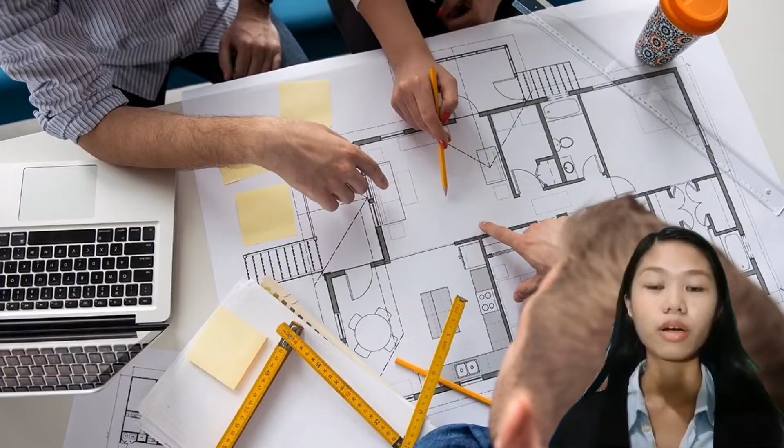The primary project players for this type of project are as follows: architects and design professionals, who create the overall aesthetic and functional appearance of structures. Landscape architects, who are responsible for the construction site and surrounding environment. The engineers, who are the primary designers for larger civil and industrial projects.

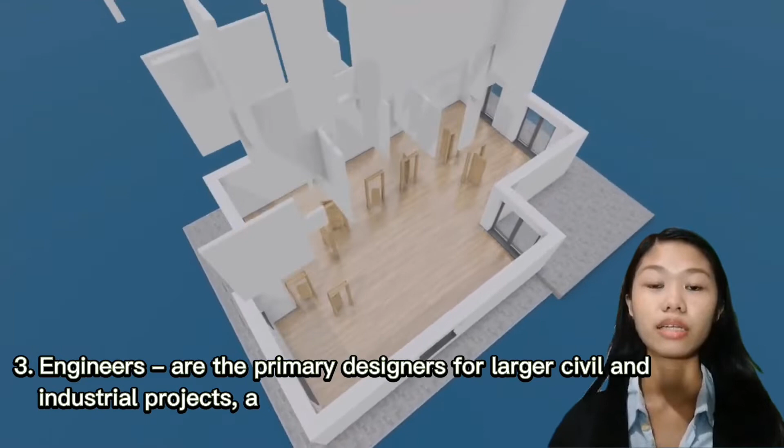Here are numerous engineering specialties available, such as structural engineers, for structural systems that support a building. Mechanical engineers, to plan and design a building's heating, cooling, ventilation, plumbing, and fire suppression systems. We also have electrical engineers, to plan and calculate electrical loads, circuits, lights, motors, transformers, and telecommunications. Civil engineers, who are responsible for the design of highways, bridges, tunnels, dams, site drainage, parking lots, runways, and water and sewage systems.

We also have construction professionals, who are responsible for all aspects of construction work. They interpret design specifications and generate cost estimations and time schedules.

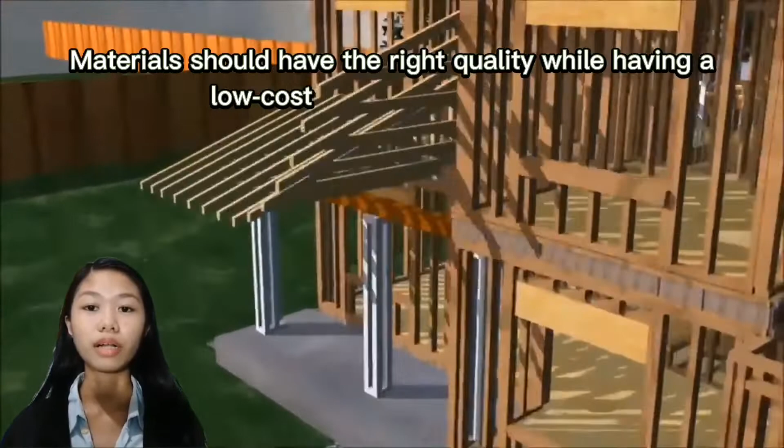The second subtopic is all about materials. Materials are a prime expense in construction, which is why material management is crucial in planning and controlling construction projects. Material management includes purchasing, logistics, and material control. Materials should have the right quality while having a low-cost construction process.

Having poor material management can lead to large and needless building expenses. Material management can be done during the planning and scheduling stages or even in the monitoring stage.

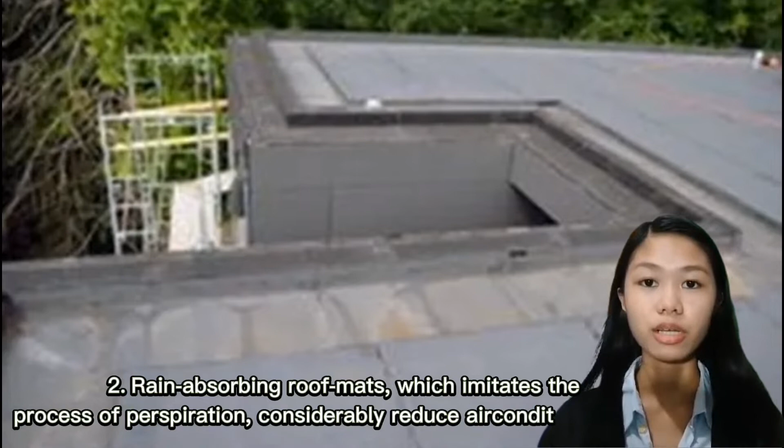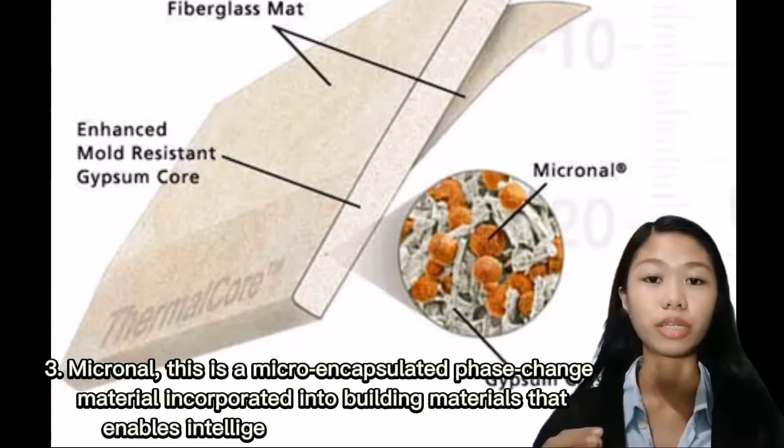Now I will give examples of advanced building and finishing materials that are recyclable, energy efficient, and reduce life cycle costs. First, we have IQ Natural, an advanced vinyl flooring which is 100% recyclable using a bio-based plasticizer. A rain-absorbing roof mat, which imitates the process of perspiration and considerably reduces air conditioning costs. Micronal, which is a micro-encapsulated phase change material incorporated into building materials that enables intelligent temperature management.

Self-healing concrete is generated through the addition of bacterial spores. It is estimated to reduce lifetime costs up to 50%.

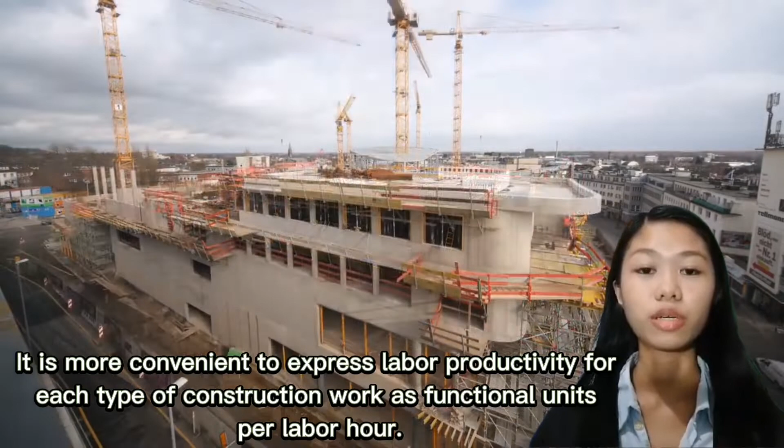The third and last subtopic for budget planning is labor. Labor accounts for a substantial portion of construction costs, and the number of labor hours spent executing a task in construction. It is more convenient to express labor productivity for each type of construction work as functional units per labor hour. The worker's performance over time should be tracked and measured by the contractor or the owner.

For non-productive activities, it focuses more on the total hours spent to complete the entire project. The actual working hours are calculated under the most suitable conditions at a project site.

Choosing proper material and improving a building or home's safety is crucial. We must be more critical, vigilant, and conscious of the materials used when building homes. We must first check its durability. It is the ability of a product to survive and to remain serviceable over a long period of time.

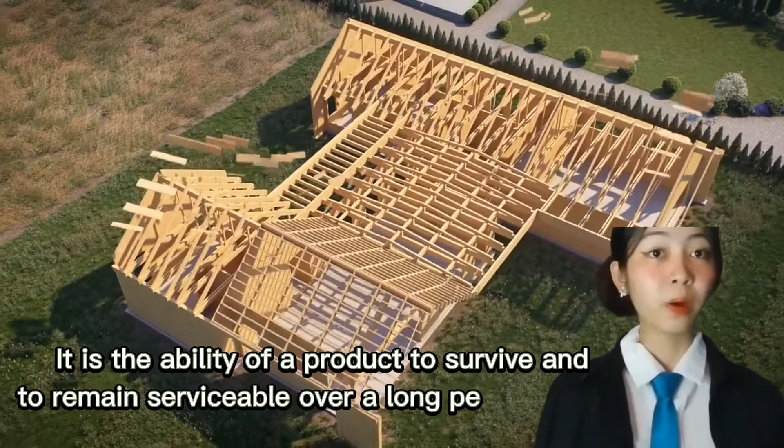How to check if the products are durable? People should check the qualities of materials. Is it sturdy? Will you be able to use it for a long period of time? Is it a pressure-resistant item? Those questions can be used as a guide to check if the materials you will use are durable. Using a durable item will not only help you have a durable home, but you will also help reduce waste and save our environment.

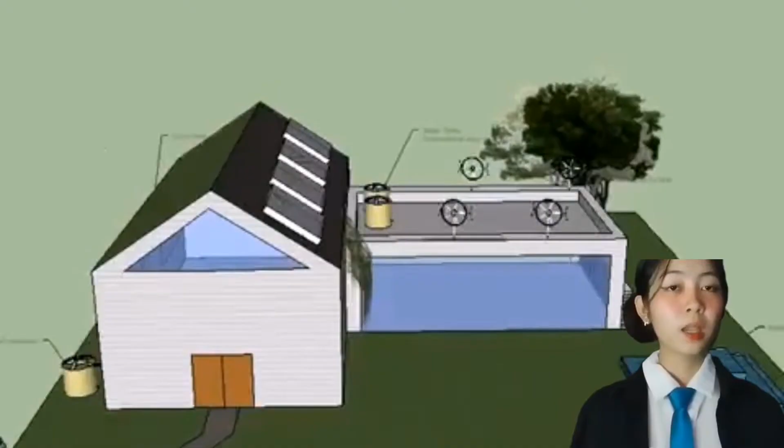Second is sustainability. Sustainability implies meeting our own needs without jeopardizing future generations' capacity to achieve their needs. People should check the product's sustainability. Look for items with labels from reputable groups that assess each item's environmental impact. You should shop locally, determine the supply chain's long-term viability, and consider eco-friendly products as investments.

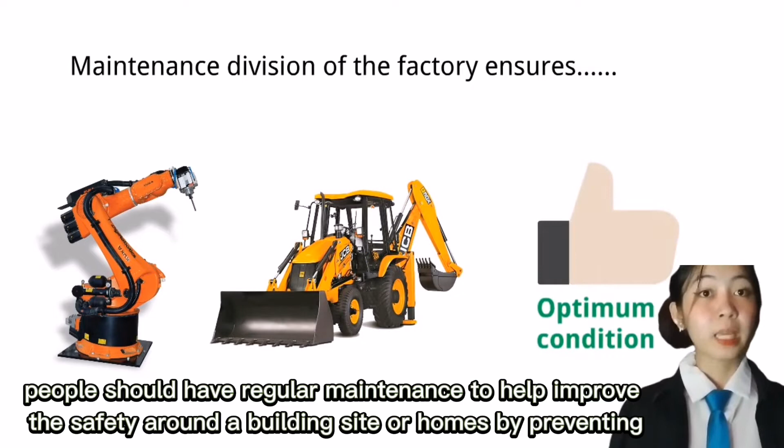Third is maintenance. People should have regular maintenance to help improve the safety around a building site or home by preventing several potentially dangerous events such as typhoons, floods, and earthquakes. Maintenance and replacement appear to have the biggest influence on energy-efficient buildings with long service lifetimes. Building maintenance is crucial because it maintains the safety and comfort of anybody who lives or works in the building. Proper regular maintenance can save property owners money on a long-term basis.

Last but not the least is the performance. Exact performance prediction requires a full understanding of material properties needed in creating budget-friendly spaces, including excellent strength, hardness, heat resistance, as well as abrasion and corrosion resistance.

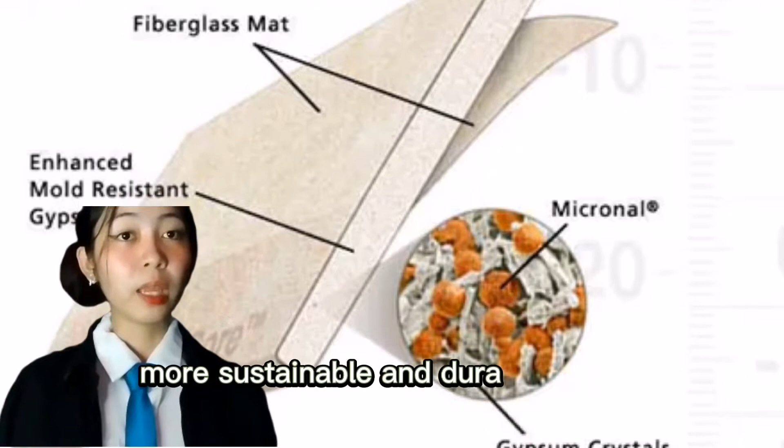People should find tools and equipment that are not expensive yet still have the performance value needed to have more sustainable and durable spaces, best for calamity-prone areas. To ensure the material's long-term performance, a material performance standard establishes a level of expected material performance.

There are specific designs and ways to construct disaster-resilient homes for specific natural disasters. We will focus on two that are very common in our country: typhoons and earthquakes. Since the Philippines is located within the Pacific Ring of Fire, it's more likely to get typhoons, storms, and earthquakes, which is why it's important to know how to recover quickly from these disasters and salvage what can be saved.

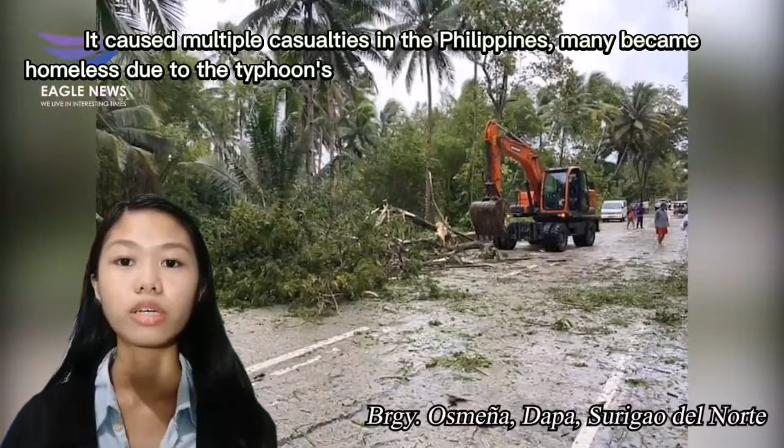In 2021, the Philippines had over 23 named tropical cyclones reported, one of which is Super Typhoon Rai, locally known as Bagyong Odette, the typhoon that ended the year with great devastation to the citizens. It caused multiple casualties in the Philippines, and many became homeless due to the typhoon's ability to wreck weakly built infrastructure.

Earthquake drills alone can't help with the infrastructural damage to buildings and homes which people use to work, school, and live in. They have to build their houses designed to tolerate earthquakes, storms, and other natural disasters that can happen in a disaster-prone area. This will be a video demonstration in making disaster-resilient homes for both storm and earthquake. Is it still having affordable materials?

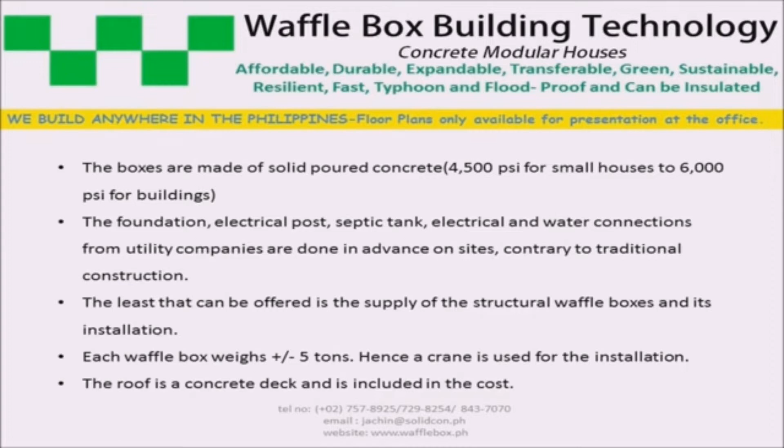Waffle box is an alternative building system that is affordable. Why affordable? Because waffle box uses a reduced quantity of concrete, steel bars, and cement. Durable because the waffle box system is resisted by micro portal frames. The boxes have perimeter frames that resist earthquakes.

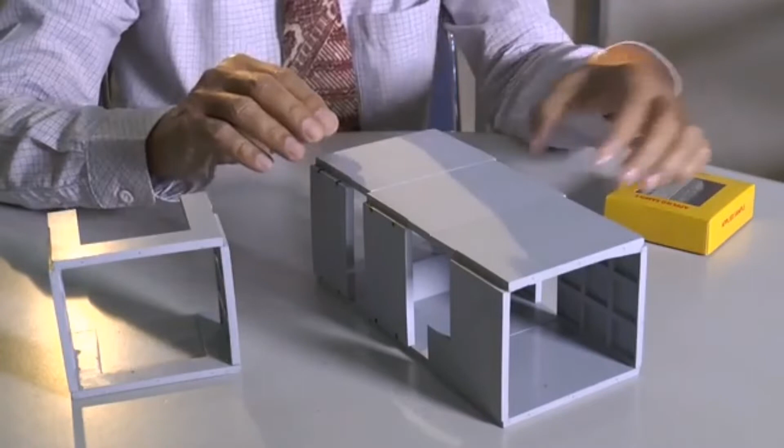So for a box, you have 4 micro portal frames. In one small house, you will have 3 boxes, totaling 12 portal frames. Any forces induced by an earthquake or wind are resisted by these 12 micro portal frames. This is different from the traditional hollow block construction.

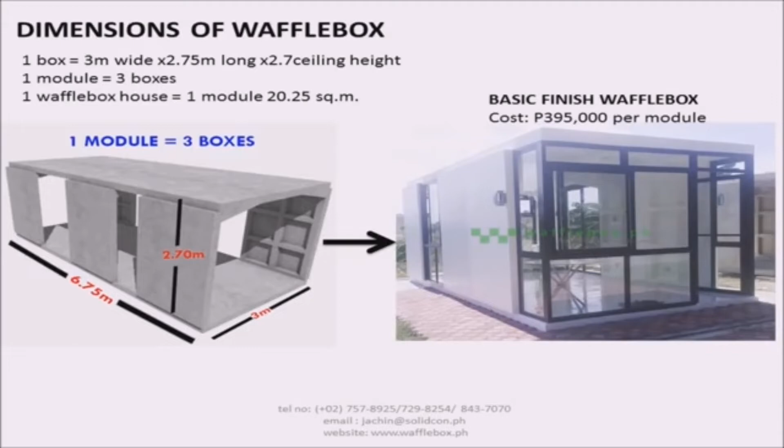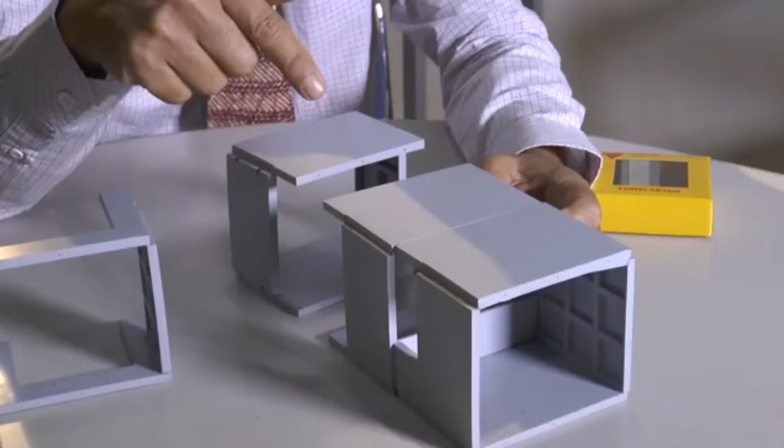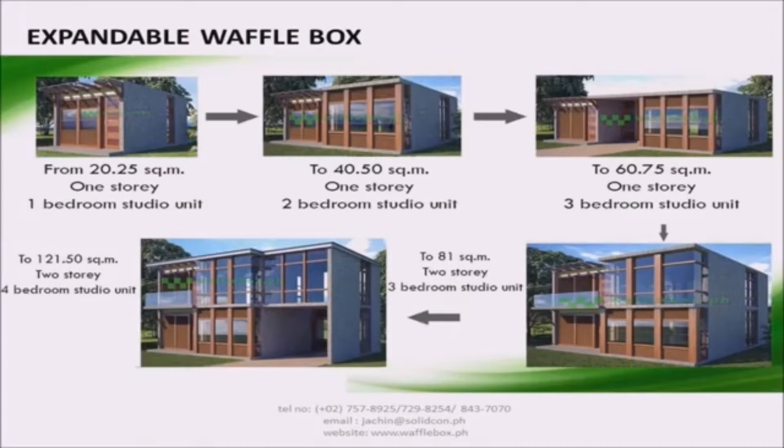It's resilient because these are prefabricated modular houses which are readily available in case of emergency. You can transfer or relocate your houses to any part as you wish. It's flood-proof because you can raise the boxes from the ground, and expandable because from the basic module, you can add to your house sideward or upward. You can also insulate the waffle box using this waffle.

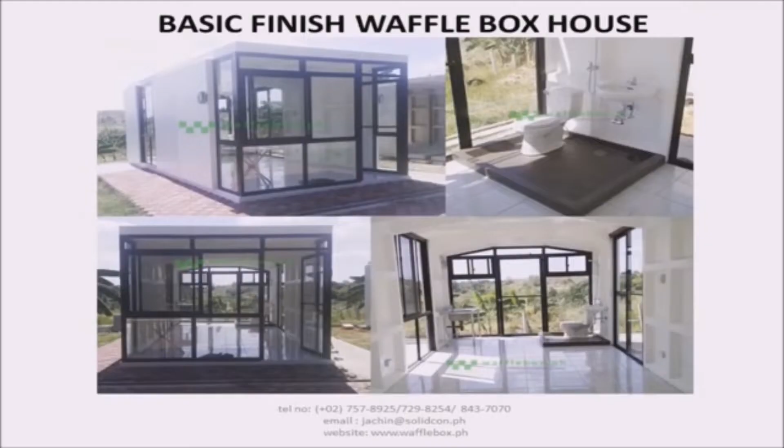The construction period is almost half the length of the traditional building system. We install the basic waffle boxes and then the owner selects their own designs. The destruction of the unit will be very minimal. So what we need from you is the right information about your future plan so that those loads, either sideward or upward, will be carried by the foundation.

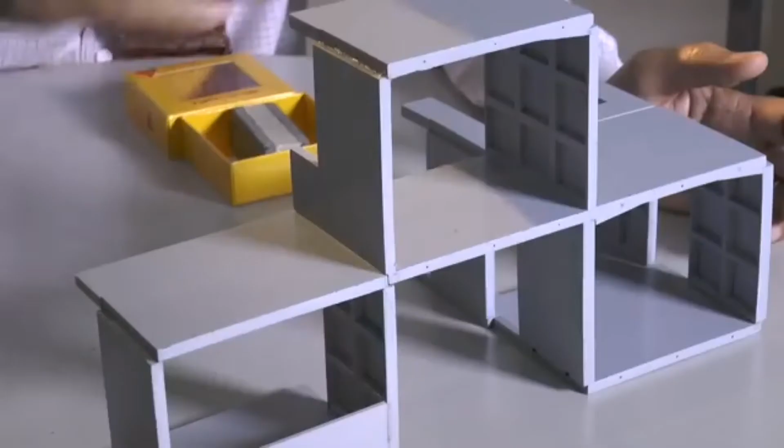The microportal frame is very efficient in both vertical load and horizontal load. For example, this is a waffle box studio unit, 3 meters wide, 6.75 meters long. When the earthquake strikes horizontally...

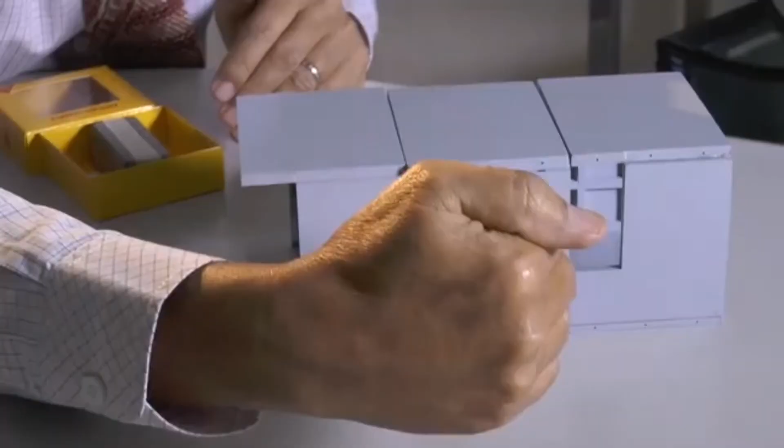The earthquake load is divided among each box: 4, 8, and 12. Any horizontal load is divided into 12, meaning the earthquake load resisted by this frame is only 1/12 of the total earthquake load. And the next portal frame will also resist 1/12, and so on and so forth.

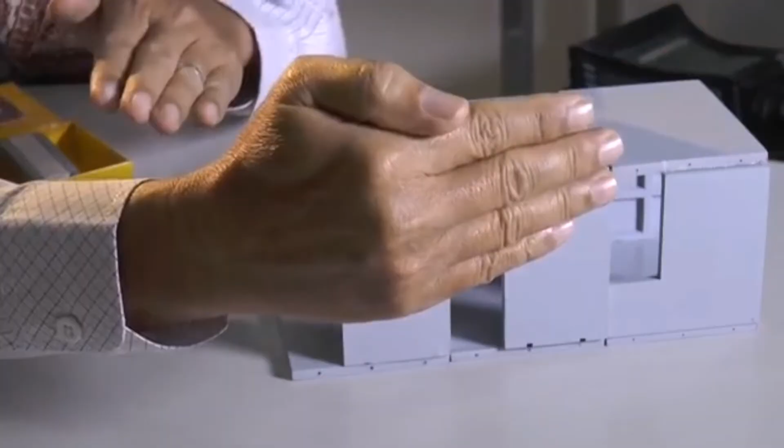Let's compare that to the traditional hollow block system. In a typical hollow block system, you will have a post on both ends and maybe a post in the middle. When the earthquake strikes, the load is resisted by only 1, 2, or 3 posts in the traditional hollow block system, which is a bigger load than 1/12.

Why do we discourage our customers from providing their own roof? Because waffle box gives you a free roof deck, which you can also use as your working area, party area, or similar purpose.

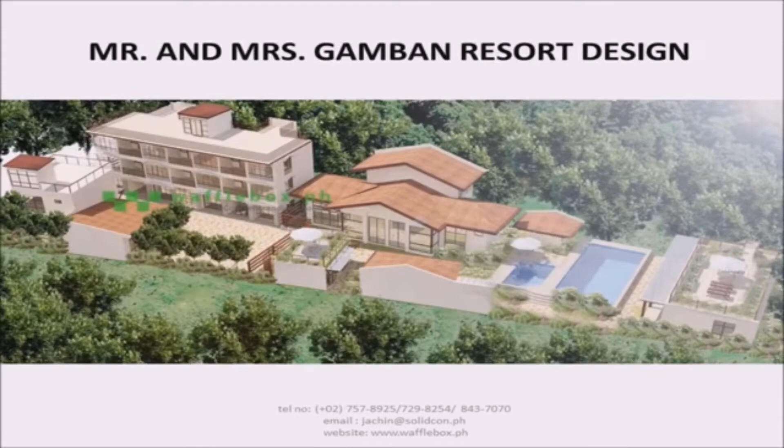We have different designs, model houses that will not appear like the basic boxes. So for buildings, you can cover this with all glass. For houses, you can have decorative windows. You can have accessories outside. What you will have is a durable house.

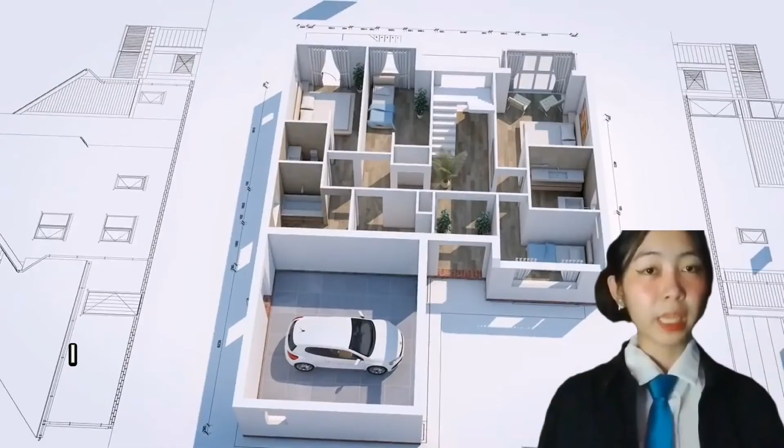Safety is one of our top priorities, and our homes may be one of the safest places for us to feel protected. Improving its safety is crucial. We must be more critical, vigilant, and conscious of the materials, planning, techniques, and designs used in its construction. Let us ensure that no one will be injured and that we are free from hazardous areas.